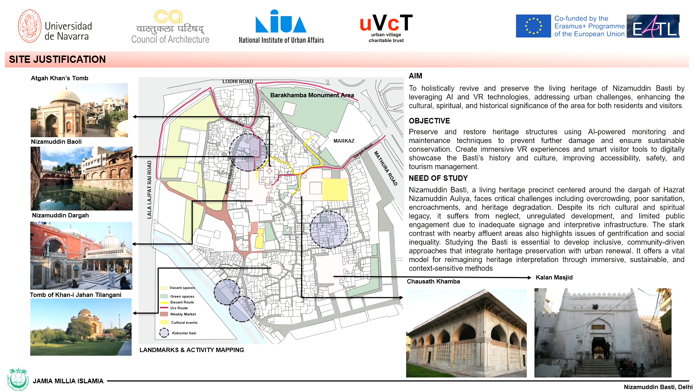Lastly, the need for this study stems from visible issues: overcrowding, sanitation, heritage neglect, and encroachments. Despite its rich history, the Basti lacks proper signage, interpretive infrastructure, and remains in contrast to gentrified nearby areas. Using AI and VR, we aim to bridge this cultural and technological gap through sustainable and inclusive urban renewal.

To support our justification, we conducted a micro-level case analysis along Musaffir Khana Road, one of the inner spines of the Basti. We analyzed building conditions and found a high concentration of poor quality structures in red, fair in brown, and only a few in good condition.

Most buildings here are added incrementally, often without approval, leading to fragile built fabric. The land use map shows a complex mix of residential, commercial, institutional, religious, and heritage uses, all tightly packed. This lack of zoning controls results in chaotic interfaces between sacred spaces and commercial spillovers.

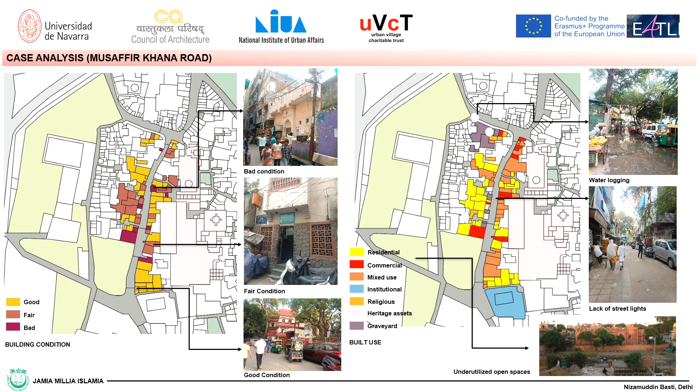Common problems documented on the ground include waterlogging, lack of proper lighting, and large underutilized open spaces, especially near heritage nodes. Together, this analysis clearly highlights the urgent need for strategic tech-integrated urban regeneration and supports our decision to focus on this area using immersive and AI-aided tools for design and management.

Some of the issues that have been identified are overcrowding and urban congestion. The streets are extremely narrow with dense population. Buildings are often added without planning permissions, which leads to poor ventilation, fire risk, and difficulty in emergency access.

There are sanitation and public health issues. Limited sewage infrastructure, open drains, and poor solid waste management lead to water contamination, mosquito breeding, and high incidence of diseases, especially during monsoons.

Then there's encroachment and heritage damage: unregulated construction encroaching upon protected heritage sites like Chausath Khamba, Urs Mahal, and the Baoli area. This causes damage to ancient structures, with illegal shops attached to tombs and mosques.

There's the issue of water quality and Baoli preservation. Pollution of the Baoli water occurs due to seepage of modern sewage and lack of natural rainwater recharge. It threatens the survival of one of Delhi's few active medieval stepwells.

Social inequality and gentrification is another concern. As Nizamuddin East, which is nearby, becomes a very upscale basti, residents feel neglected and economically pressured. It impacts the rise in land prices, loss of traditional community fabric, and cultural displacement.

Safety and security concerns include petty crimes, pickpocketing, and scams targeting people, along with lack of adequate night lighting in interior alleys. This leads to deterioration of public trust and tourist apprehension.

The strategies which are being proposed are as follows.

The peripheral areas of the Basti, particularly along the main city roads and the nallah, are proposed to be enhanced through the development of landscape walkways, public parks, and the improvement of building facades, with the objective of creating a more welcoming and aesthetically urban edge for both visitors and daily commuters.

The treatment of the facades of the main buildings along the Basti main roads, the upgradation of road infrastructure through proper paving and grading, installation of adequate street lighting, and enhancement of drainage and sewage systems to mitigate frequent flooding and sewage overflow. Additionally, the relocation of overhead utility cables to underground conduits is essential to improve safety and visual coherence in the urban landscape.

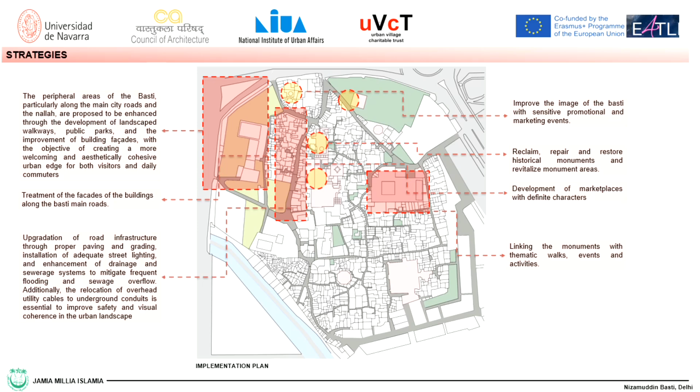To improve the image of the Basti with sensitive promotional and marketing events, to reclaim, repair and restore historical monuments and revitalize monument areas, development of marketplaces with definite characters, linking the monuments with thematic walks, events and activities.

Open space design and cultural strategies. This slide highlights the open space strategies proposed to revitalize Nizamuddin Basti by integrating cultural, historical, and ecological layers into a cohesive urban fabric. At the center of the strategy is the creation of a multi-purpose cultural ground, which not only acts as a community gathering space but also facilitates cultural performances, exhibits, and festivals that reflect the area's heritage.

The open space design strategies emphasize flexible zoning for performances, use of sculpture plazas, and integration of local materials to retain the vernacular character. We aim to introduce heritage markers, QR codes, and storytelling installations to make the visitor experience more immersive and educational. On the exhibition front, we propose the use of modular pergolas, interactive podiums, portable displays, and digital interventions to make the space dynamic and engaging.

The revitalization of open spaces for cultural exchange includes shaded zones, ambient lighting, and multi-purpose stages to host both formal and informal gatherings. Moving to the right side of the slide, we see a breakdown of two key strategy clusters.

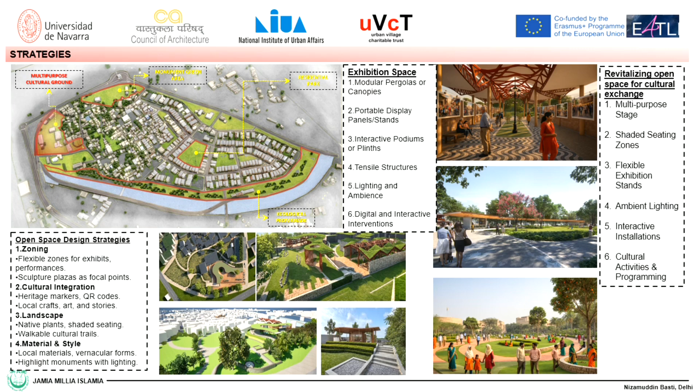Under exhibition space, the design integrates flexible and mobile elements such as modular pergolas, portable panels, and interactive podiums. These allow for temporary exhibits, community storytelling, and rotating cultural showcases. The use of tensile structures and digital installations not only enhances visual interest but also accommodates a variety of user groups and event types. These spatial interventions aim to reclaim public spaces, activate platforms for community engagement and cultural identity, ensuring both locals and visitors experience the historic essence of Nizamuddin in a meaningful and participatory way.

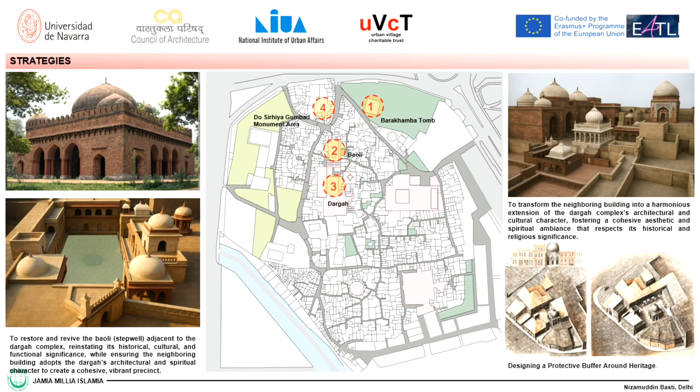Lastly, strategy 4 introduces the idea of a protective buffer zone around heritage structures, ensuring controlled development in surrounding areas. This buffer will help preserve sight lines and prevent the heritage buildings from being visually or physically overwhelmed by newer construction. Together, these four strategies aim to regenerate the built environment in a way that respects Nizamuddin's spiritual core, enhances its urban aesthetics, and ensures sustainable heritage conservation through community involvement.